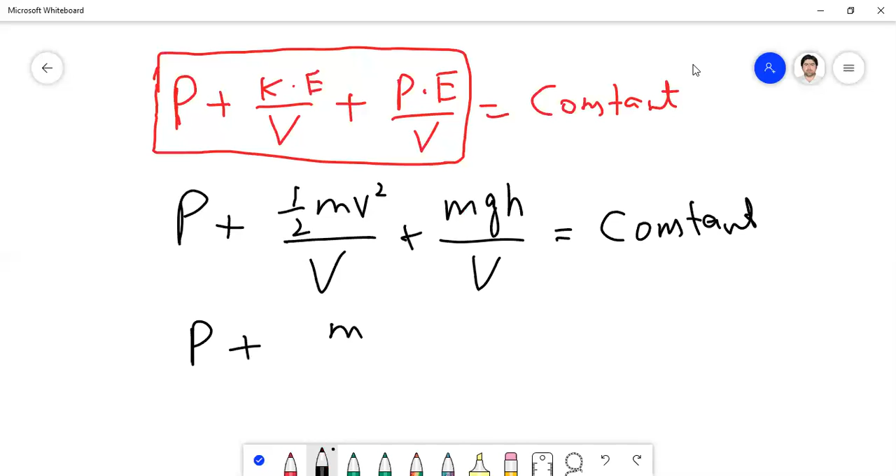over capital V. We are discussing basically a physical interpretation of this Bernoulli equation, so we will not move towards the derivation. To simplify the equation, let's divide the 2 in the second term into the volume. So P plus mv square over 2V, plus mgh over capital V, the volume, is equal to constant.

Here we can replace the mass, because this mass is the mass of the flowing fluid, which is equal to the product of density and volume. As we know, mass per unit volume of any object is called the density of the object. So from that equation, mass equals density times volume, and we can replace the mass with the product of the volume and density of the fluid,

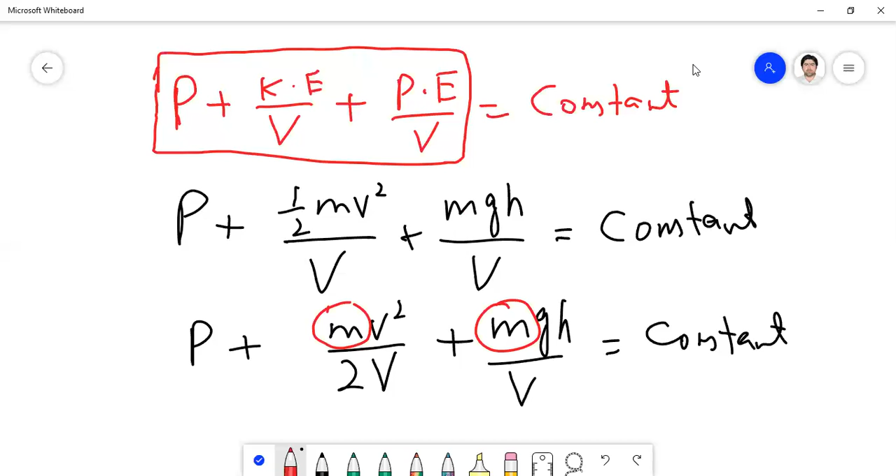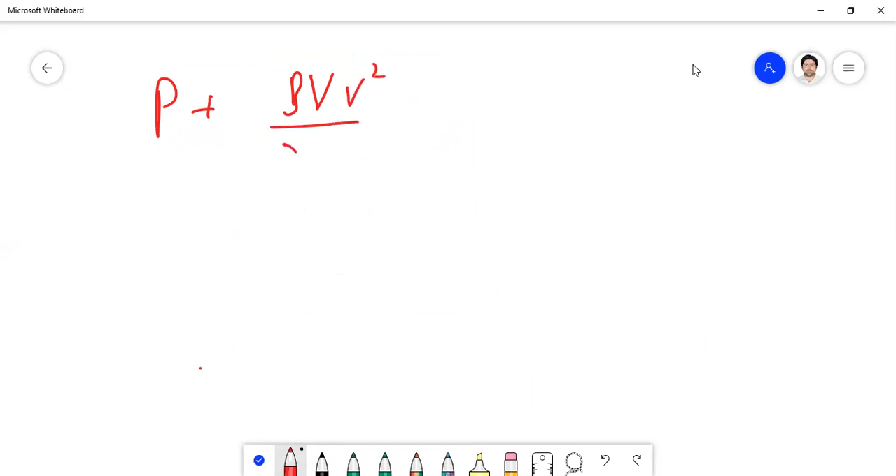which is basically constant. The density of the fluid is constant, and volume can be taken from the volume of the cross section of the pipe. So next, P, the static pressure, plus for m we write density into volume, times small v square divided by 2 capital V, plus density into volume into g into h divided by capital V, the volume, which is equal to constant.

So we can cancel out the terms volume in the second and third terms. Volume can be cancelled with the volume. Here also we can cancel the volume. So the result would be pressure plus rho v square divided by 2, which is also known as half rho v square.

So plus rho gh. All three are basically also called pressure, because we cannot add different terms in arithmetic. In arithmetic, we can only add terms which have the same nature. So all these are three types of pressure. One is a static pressure, and these two are the dynamic pressure.

The middle term represents the dynamic pressure, this represents the static pressure, and this represents the elevation pressure, the pressure in terms of potential energy. This is the pressure in terms of kinetic energy, and this is the static pressure. So the sum of all these three types of pressure must be equal to a constant.

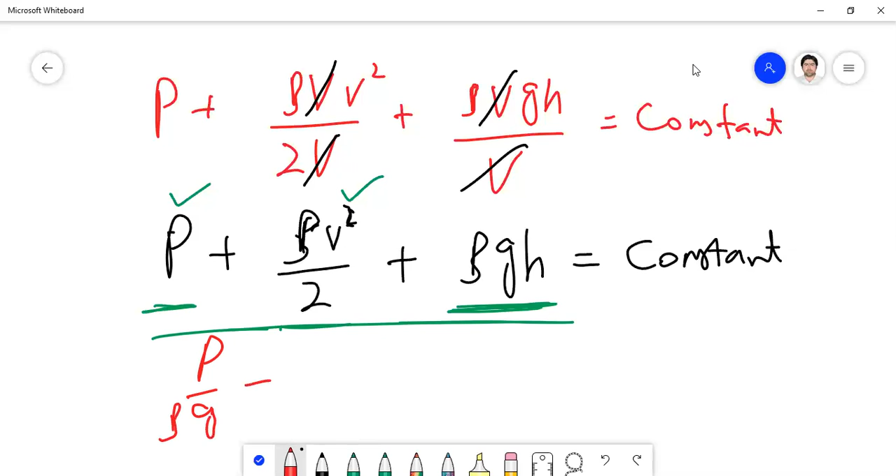So the next answer will be P, the pressure, divided by rho g, plus rho v square divided by 2 rho g, plus rho g h divided by rho g. And also divide the right side. On the right side we have a constant value.

Dividing the constant value by rho g: rho is the density of the fluid, which is constant, and g is also a constant term. So dividing a constant by a constant, we get a new constant, so the constant remains the same. Now the terms in the second and third values can be cancelled out: in the second, rho cancels with rho, and in the third term, rho g cancels with rho g.

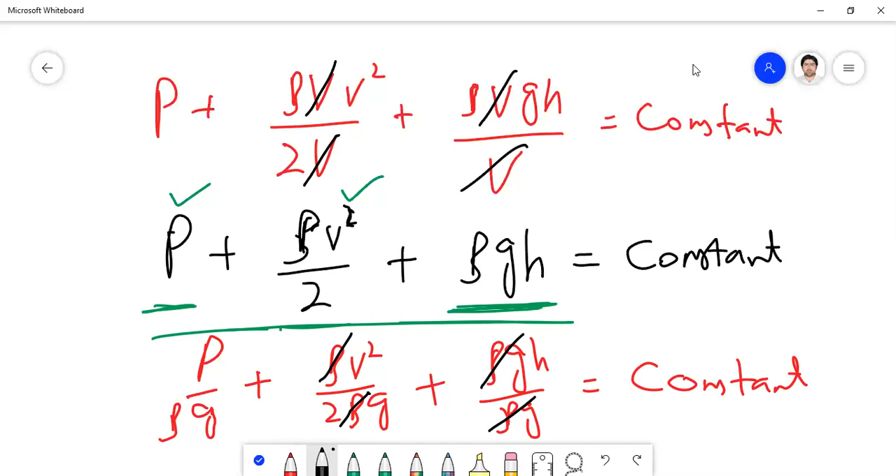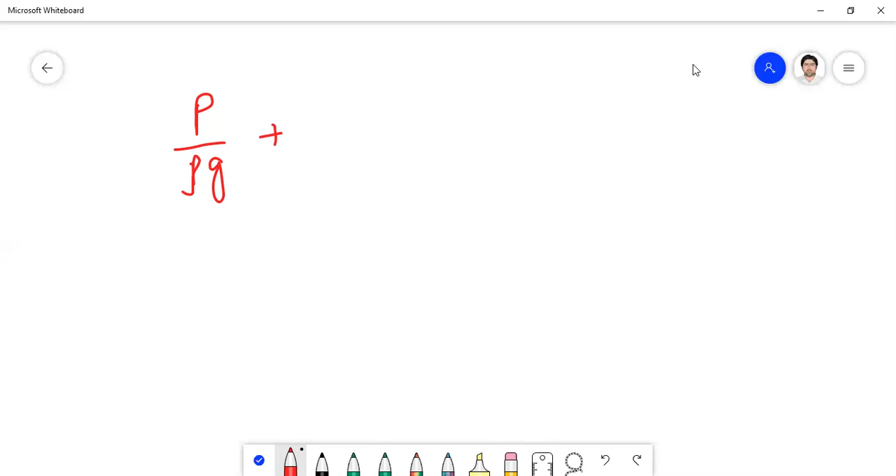So now we can write the final result: P over rho g, and rho g can also be called gamma, plus v square over 2g plus only h, which is equal to constant.

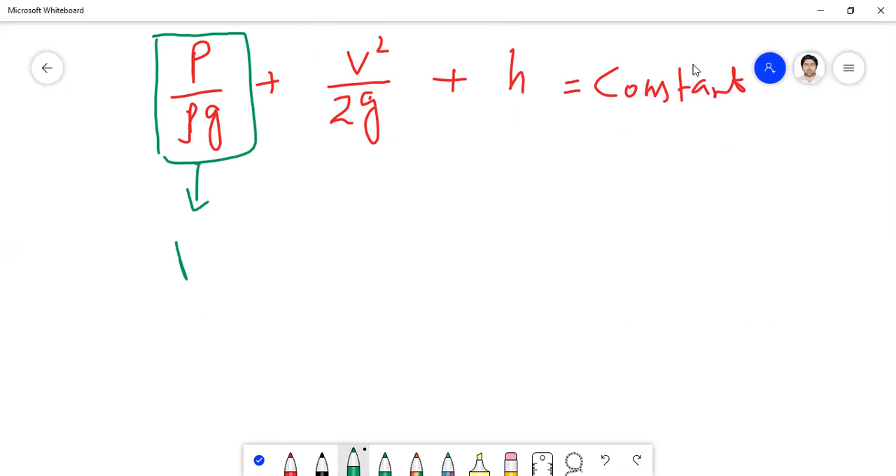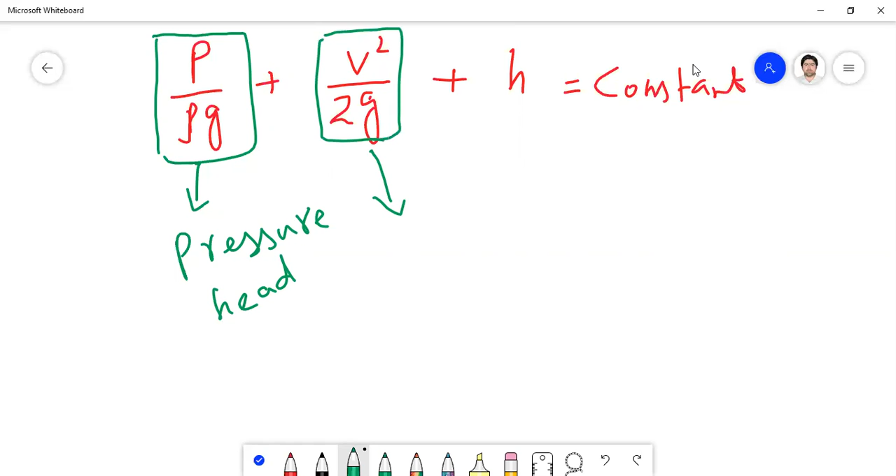We have only v square over 2g, so it's right. So this is the Bernoulli equation in terms of head. The first value is known as pressure head. This is called dynamic head or velocity head.

And the third term is known as elevation head, which is written in terms of Z in the textbook. We can also replace it with h, it doesn't matter. This is called elevation head.

The elevation head and the velocity head can also be called dynamic head. The first head, the pressure head, is also called the static head. These are the three types of pressure heads whose sum must be equal to a constant according to Bernoulli. Let's move to the book and read this topic, along with other types of pressure like static and stagnation pressure, and the concept of the stagnation point.

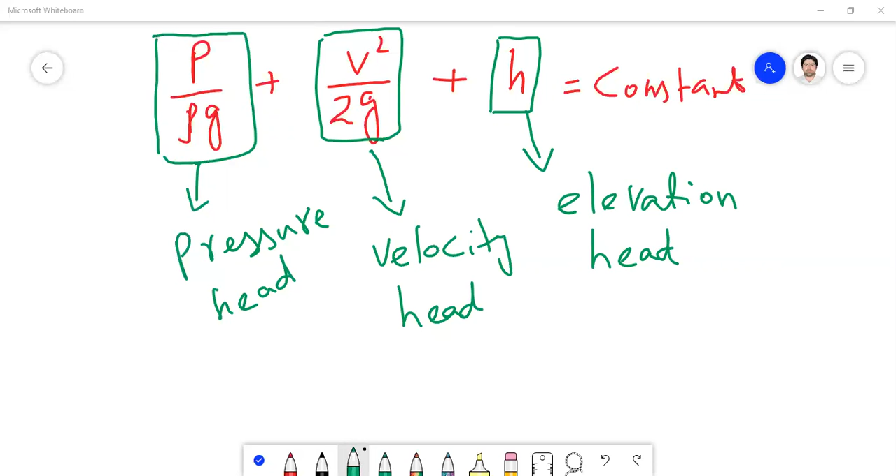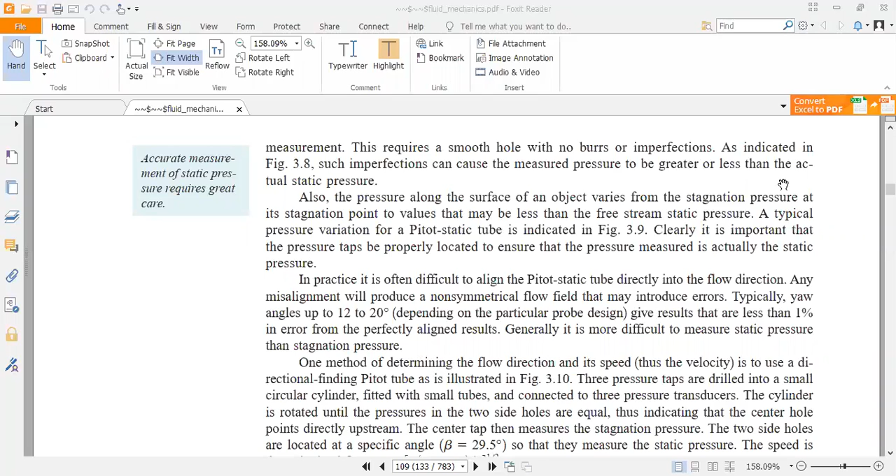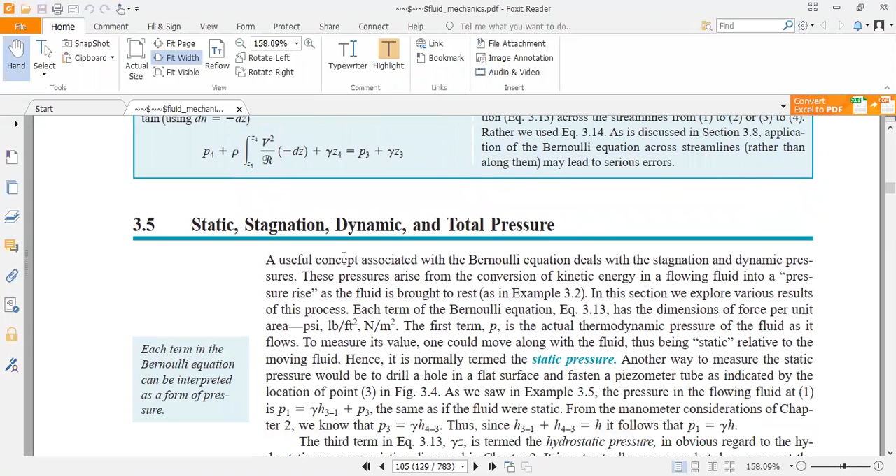So here we can explain the pressure head. Our next topic is static, stagnation, dynamic, and total pressure. What is total pressure? Total pressure is the sum of all the types of pressure, whose sum must be equal to a constant according to Bernoulli.

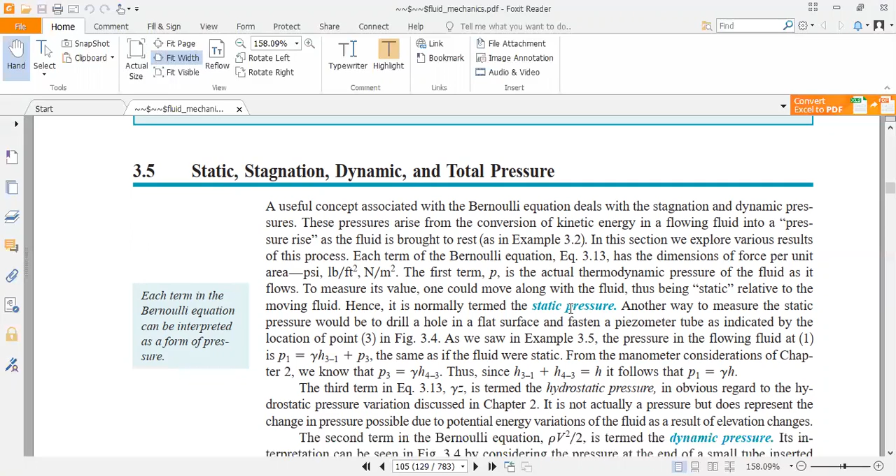The first term on the left side of the Bernoulli equation is called the static pressure, represented by P, or in terms of head by P over gamma, or P over rho g. Static pressure can be measured with the help of a long tube, or by moving an object whose speed equals the speed of the flowing fluid, and by comparing with this speed we can find the pressure of the flowing fluid.

So whenever the flowing fluid is moving with constant velocity, and we move an object with the same velocity as the fluid, the relative velocity of the fluid and our object would be zero.

So it means we can say that the fluid is basically static with respect to us. So in this way we can find the static pressure of the flowing fluid. But another method to find the static pressure is by using the piezometer tube. A piezometer is also an instrument which is used to measure the pressure of the fluid, static or flowing fluid.